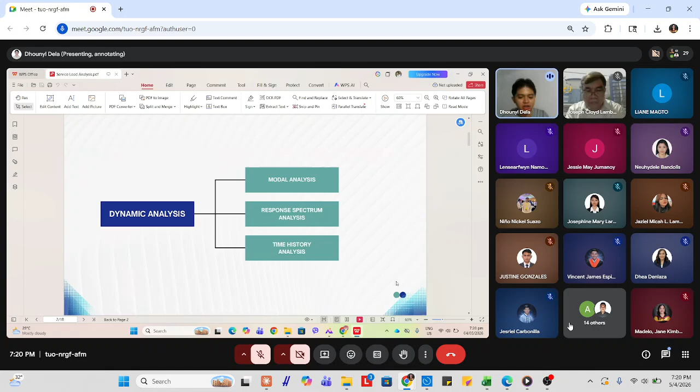So there is atong section 406.6.3.2. So it is stated sa point 1, the immediate and time-dependent deflections due to gravity loads shall be calculated in accordance with section 424.2. And for the next section, it shall be permitted to calculate immediate lateral deflections using a moment of inertia of 1.4 times I, defined in section 406.6.3.1, or using a more detailed analysis, but the value shall not exceed the gross moment of inertia.

So sa section 406.6.3.1, moment of inertia and cross-sectional area of members shall be calculated in accordance with tables A and B unless a more rigorous analysis is used. If sustained lateral loads are present, your I for columns and walls shall be divided by that quantity, where your beta sub ds is the ratio of your maximum factored sustained shear within a story to the maximum factored shear in that story associated with the same load combination. So ako ipakita ang duha ka tables, tables A and B. So table A, you have your moment of inertia and cross-sectional area permitted for elastic analysis at factored load level.

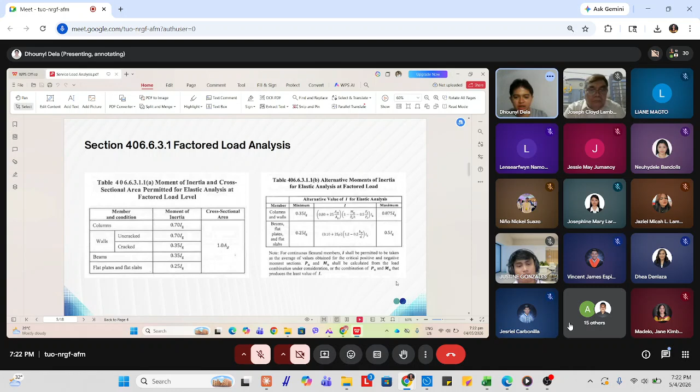Table B, mas tedious ang approach kay gina-consider niya si PU and si MU. Okay? So kani factored load analysis naman, dili na ko mo dive deep ani nga topic.

So for the next section, 406.6.3.1.2, for factored lateral load analysis, it shall be permitted to assume your moment of inertia equal to 50% of your gross moment for all members, or to calculate I by a more detailed analysis considering the reduced stiffness for all members under the loading conditions.

For the next section, for factored lateral load analysis of two-way slab systems without beams, which are designated as part of the seismic force resisting system, your moment of inertia for slab members shall be defined by a model that is in substantial agreement with results of comprehensive tests and analysis, and your moment of inertia of other frame members shall be in accordance with section 406.6.3.1.1 and point 2.

Code basis lang yun, ang ato ang discussion diri. However, naa koy example sa last part sa atong discussion. So section 424.2, deflections due to service level gravity loads.

Section 424.2.1, members subjected to flexure shall be designed with adequate stiffness to limit deflections or deformations that adversely affect strength or serviceability of a structure.

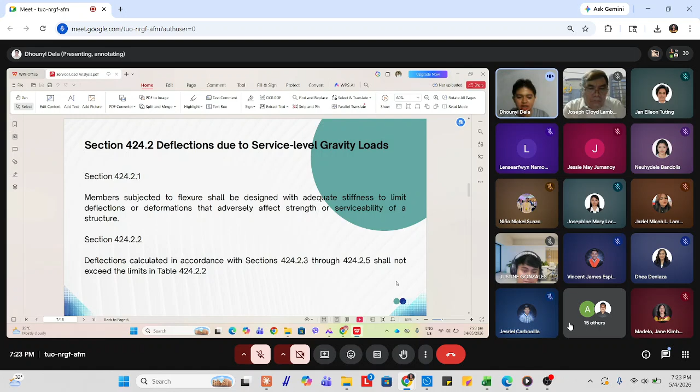And for the next section, deflections calculated in accordance with sections 424.2.3 through 424.2.5 shall not exceed the limits in table 424.2.2.

So narato ang table 424.2.2. So ang yaha is ang maximum permissible calculated deflections. So we have the following members now for flat roofs and floors.

So for flat roof with a condition not supporting or attached to non-structural elements likely to be damaged by large deflections, atong deflection you consider is immediate deflection due to maximum of roof live load, and R is your rain load. Deflection limitation is L over 180, where L is your clear span.

And for floors, so the same condition, and imong deflection you consider is immediate deflection due to L. Your limitation is L over 360.

For roofs and floors with a different condition, so you have supporting or attached. Excuse me, Engineer Dela. Yes, Doc.

So, continuing, sa roofs or floors with the condition supporting or attached to non-structural elements, so likely to be damaged by large deflections, your limitation is L over 480. And for not likely to be damaged by large deflections, your limitation is L over 240.

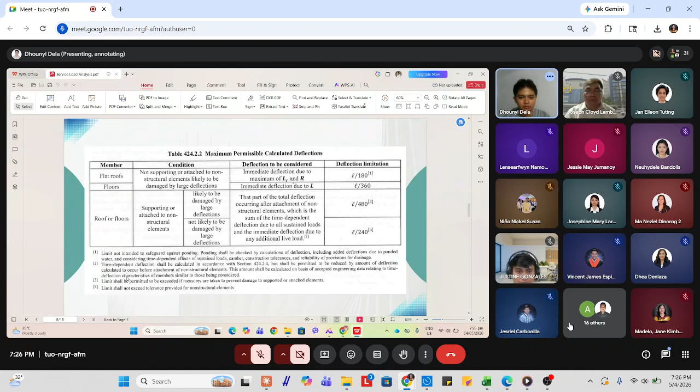Okay. For section 424.2.3, calculations of immediate deflections. So first, immediate deflections shall be calculated using methods or formulas for elastic deflections, considering effects of cracking and reinforcement on member stiffness, effect on variation of cross-sectional properties such as haunches shall be considered when calculating deflections.

And deflection in two-way slab systems shall be calculated taking into account size and shape of the panel, conditions of support, and nature of restraints at the panel edges. And lastly, modulus of elasticity, or your E sub C, shall be permitted to be calculated in accordance with section 419.2.2.

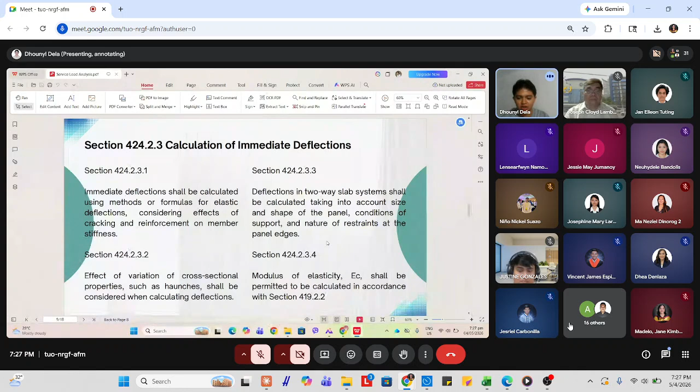So we have these formulas for non-pre-stressed members. The effective moment of inertia, or your I sub E, shall be calculated by this formula unless obtained by a more comprehensive analysis, but your effective shall not be greater than your gross moment of inertia.

So dire, your MCR, that is your cracking moment, Ma, that is your maximum moment in member at stage deflection, and kani, this is your gross moment of inertia. Your ICR is your cracking moment of inertia.

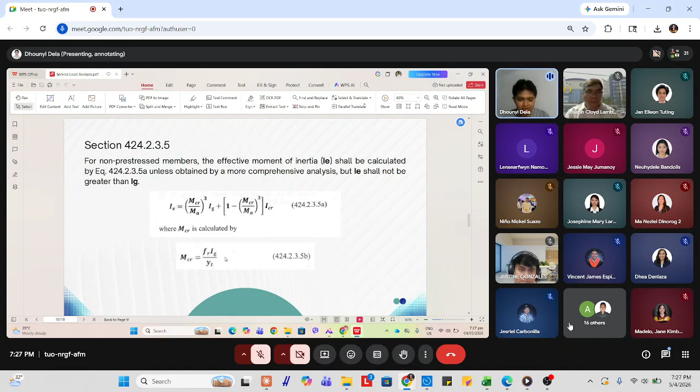Your MCR is calculated using this formula, your modulus of rupture times your gross moment of inertia over your Y sub T. So na example ani later.

And for pre-stress, class U slabs and beams as defined in section 424.5.2, it shall be permitted to calculate deflections based on the gross moment of inertia.

So you have this table. Class U means uncracked. Your limit for f sub T should be less than or equal to 0.62 times the square root of your FC prime. For transition, between uncracked and cracked, your f sub T is between 0.62 times the square root of FC prime and less than or equal to the square root of FC prime. So 0.62 times the square root of FC prime becomes your boundary.

And for cracked, you have class C, so your f sub T is greater than the square root of your FC prime.

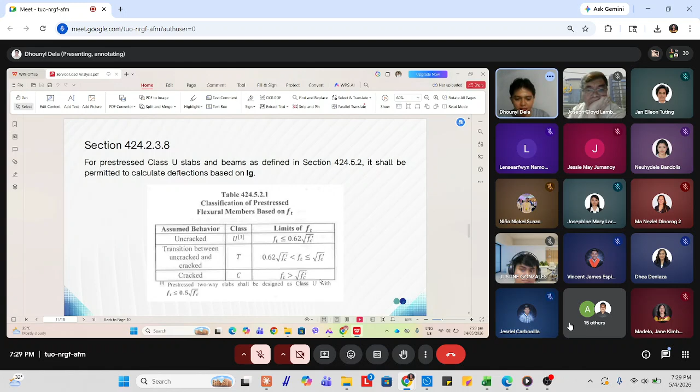For prestressed class T and class U slabs and beams as defined in section 424.5.2, deflection calculations shall be based on cracked transformed section analysis. It shall be permitted to base deflection calculations on a bilinear moment deflection relationship, or your effective moment of inertia in accordance with equation 424.2.3.5a, where your cracking moment is calculated using this formula.

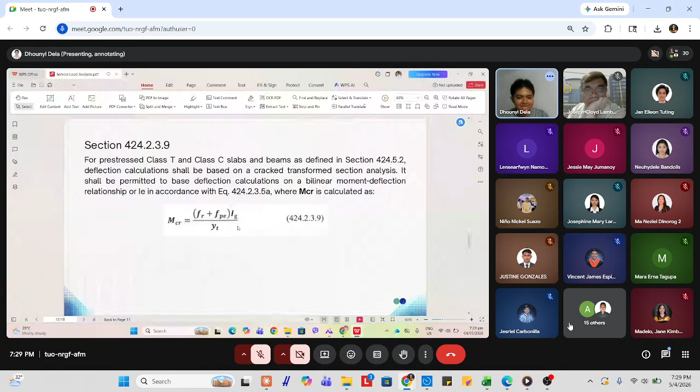For the calculation of time-dependent deflections, unless obtained from a more comprehensive analysis, additional time-dependent deflection resulting from creep and shrinkage of flexural members shall be calculated as a product of the immediate deflection caused by the sustained load and this factor, given by this symbol.

This is read as ξ over 1 plus 50 times rho prime, where rho prime equals the area of steel over your BD. So ξ is your time dependent factor, given by this table.

For sustained load duration, for example if you sustain your loads for 3 months, your time dependent factor is 1. If 6 months, that is 1.2. If 12 months, that is 1.4. If 60 months or more, your time dependent factor is 2.

Now how about if your time duration is in between, like between 3 and 6 months? You just interpolate, since it's linear interpolation.

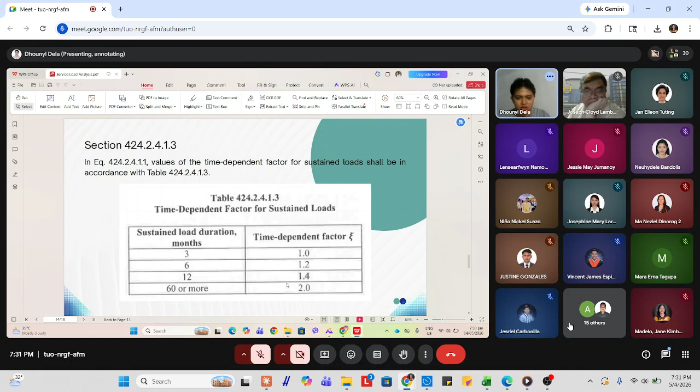Additional time-dependent deflection for prestressed concrete members shall be calculated considering stresses in concrete and reinforcement under sustained load and the effects of creep and shrinkage of concrete and relaxation of prestressed reinforcement.

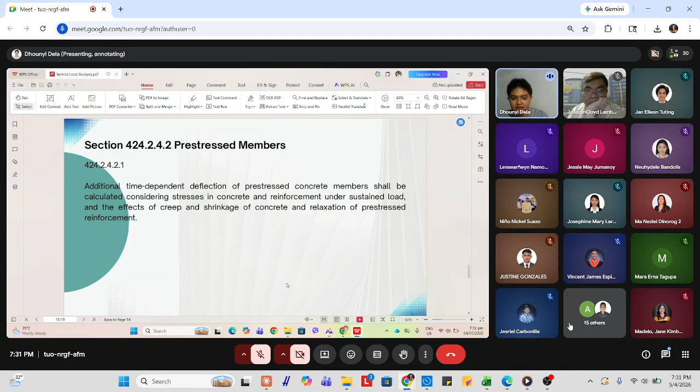Then, calculation of deflections of composite concrete sections. If composite concrete flexural members are shored during construction so that after removal of temporary supports the dead load is resisted by the full composite section, it shall be permitted to consider the composite member equivalent to a monolithically cast member for calculation of deflections.

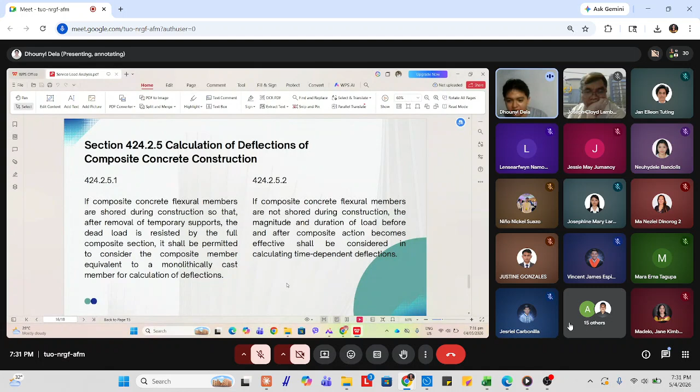If composite concrete flexural members are not shored during construction, the magnitude and duration of load before and after composite action becomes effective shall be considered in calculating time-dependent deflections.

So I have an example here. A 300 mm by 600 mm beam is reinforced with 5 16mm steel bars with steel cover of 60 mm, using FC prime equal to 28 megapascal and FY equal to 414 megapascal. Unit weight of concrete is 24 kilonewton per cubic meter. Letter A: determine the effective moment of inertia of the beam, which carries a concentrated live load of 40 kilonewton at the free end of a 2-meter cantilever span. Letter B: determine the immediate deflection of the beam.

So for the solution, here is the situation. We have a 2-meter cantilever beam carrying a uniform dead load, plus a concentrated live load of 40 kilonewton at its end. So wait.

Solving for the uniform load: you have 24, the unit weight of concrete, times the cross-sectional area of the beam, giving 4.32. Given a 60 mm steel cover, that's from the outermost fiber to the centroid of the steel, so we have 60 here, and the bottom becomes 540.

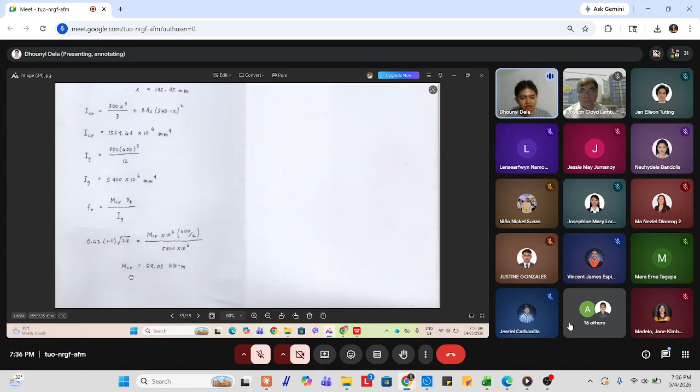Solving for your cracking moment, you have this equation. So per the code, I'll transform it in terms of FR. Your FR is equal to 0.62 times 1.0 times the square root of your FC prime. Now in the formula for modulus of rupture in the code, that 1.0 is your modification factor depending on the type of concrete used. Assuming normal weight concrete, your lambda is equal to 1.0. So times your MCR times 10 raised to 6, so the resulting answer is in kilonewton meter, times y sub t, that is 600 over 2, times your gross moment of inertia, 5,400 times 10 raised to 6. Your cracking moment then is equal to 59.05 kilonewton meter.

Now for your maximum moment, that is equal to your uniform load, 4.32 times 2 times the moment arm of 1, plus concentrated load of 40 times the moment arm of 2. So you have a maximum moment of 88.64.

Now substituting these values into this formula, you get the effective moment of inertia equal to 2,695.05 times 10 raised to 6 mm to the fourth. This solves for what letter A is asking, which is to determine the effective moment of inertia of the beam. So this is your answer.

And for letter B, what's being asked is your immediate deflection. So for the immediate deflection, you have a cantilever, so there's deflection due to dead load and deflection due to live load. Solving for your deflection due to dead load, that is given by this formula, and for your deflection in terms of live load, that is given by this formula.

Now given all that, you have your W sub D, that is equal to 4.32. Length of your beam is 2 meters. Your E here is your modulus of elasticity of concrete, that is 24,870, and your effective moment of inertia, the one we got earlier, 2,695. So substitute all that, and your total immediate deflection is equal to 1.72 mm.

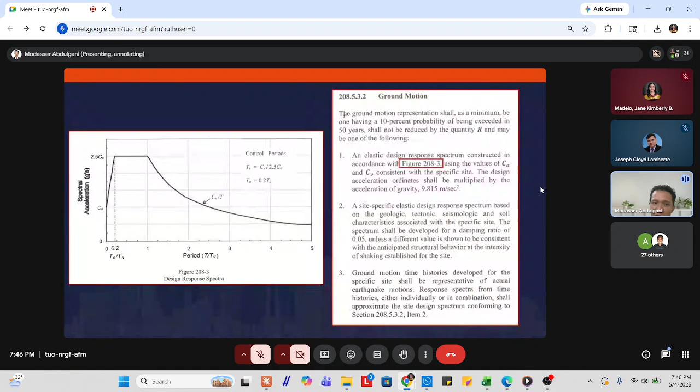And number 3, ground motion time histories developed for a specific site shall be representative of actual earthquake motions. The response spectra from time histories either individually or in combination shall approximate the site design spectrum conforming to section 208.5.3.2 item 2. So kana silang tulo si ground motion, take note ana kay makita nato ang value unya na ay reduction na mahitabo under this ground motion.

So the corresponding response parameters, including forces, moments, and displacements, shall be denoted as elastic response parameters. Elastic response parameters may be reduced in accordance with section 208.5.3.5.4. So naanay reduction kani sa 208.5.3, ato na makita mo niya.

So the base shear for a given direction determined using dynamic analysis must not be less than the value obtained by the equivalent lateral force method of section 208.5.2. If you can still remember, kaning section is mo ni atuang magamit in solving the base shear for the static force procedure. Mo ni ang gidiscuss ni Engineer Plaza last meeting. So dapat atong base shear daw sa dynamic analysis must not be less than sa atong value na makuha diri. Okay, makita na nato na.

So number of modes: the requirement of section 208.5.3.4.1 that all significant modes be included may be satisfied by demonstrating that for the modes considered, at least 90% of the participating mass of the structure is included in the calculation of response for each principal horizontal direction.

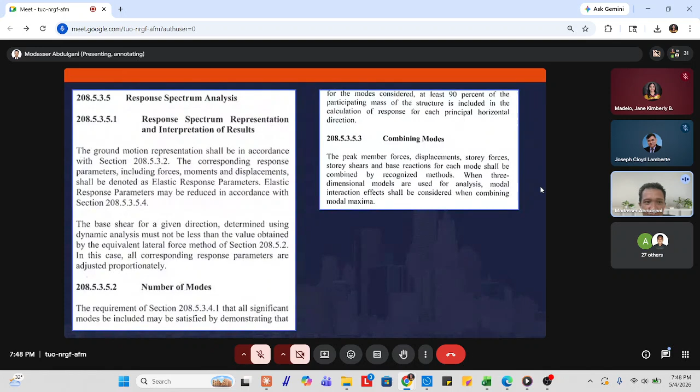Combining modes: the peak member forces, displacements, story forces, story shears, and base reactions for each mode shall be combined by recognized methods. When three-dimensional models are used for analysis, modal interaction effects shall be considered when combining modal maxima. So mo ni atong gi-mention ganiha nga section sa reduction of elastic response parameters.

So elastic response parameters may be reduced for purposes of design in accordance with the following items, with the limitation that in no case shall the elastic response parameter be reduced such that the corresponding design base shear is less than the elastic response base shear divided by the value of R. So kung nakita ninyo ato ang mga values sa static, katong ganiha, naa ay denominator na R.

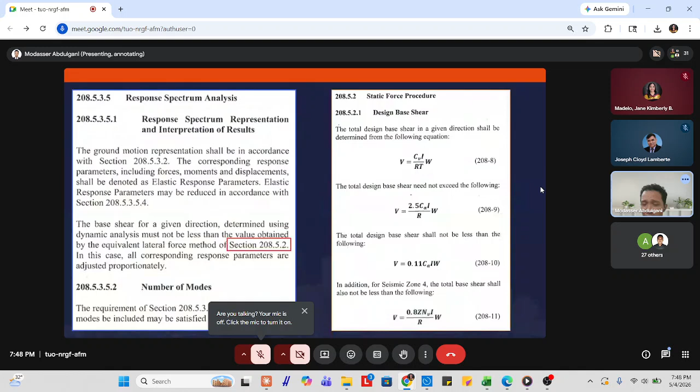So naa ay reduction of the value by dividing by R. So nganong mo-divide man ta og R? In reality, structures are expected to yield and dissipate energy through plastic deformation. If you can still remember sa atong steel design sa undergrad, dili lang taman sa yield strength sa atong steel. Taman ta sa plastic hinge, maka-create pa sa plastic hinge sa plastic design. So, full value of R in static procedure reflects this ductility and energy dissipation capacity.

However, since response spectrum analysis assumes the structure remains elastic, it cannot directly simulate yielding, cracking, or plastic hinge formation. To compensate for this limitation and avoid unconservative, unsafe results, the code reduces the benefits of R. So naa tay reduction. So sa reduction na to, naa tay basis diri.

Number 1, for all regular structures where the ground motion representation complies with section 208.5.3.2, item 1, katong sa ground motion, kung diri daw siya nabilang, elastic response parameters may be reduced such that the corresponding design base shear is not less than 90% of the base shear determined in accordance with section 208.5.2.

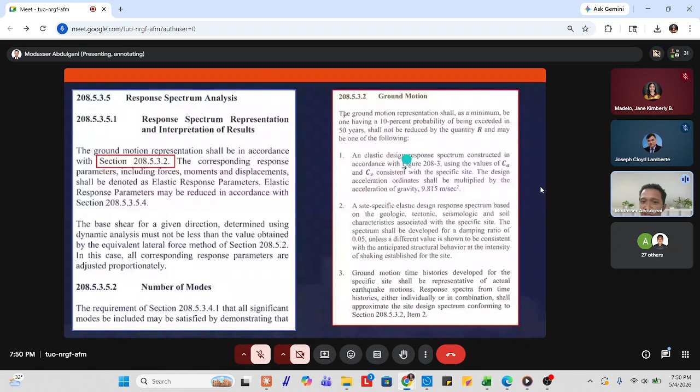Sa atong design response spectra, di ba, na-mention man to sa first slide, nga ang response spectrum analysis gina-assume niya na ang structure will behave elastic. So elastic ni siya. So naa tay reduction of R. So kung mo-reduce siya, i-divide ta og R, mu-ubos ni siya. Mu-ubos atong result.

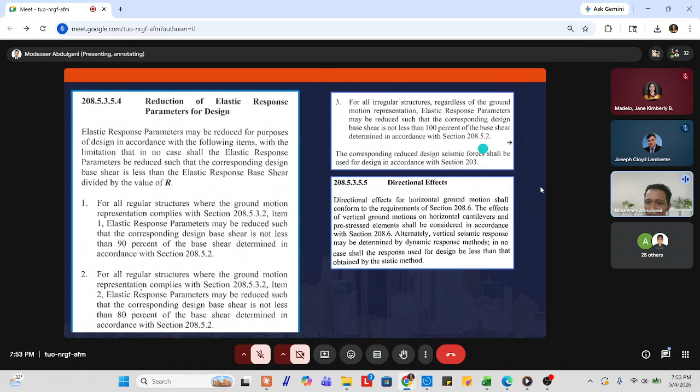And the next one, for all irregular structures, regardless of the ground motion representation, elastic response parameters may be reduced such that the corresponding design base shear is not less than 100%. So kung irregular, dili siya mu-ubos og 100% sa static. So unsay mahitabo kung mas mu-ubos ang dynamic base shear? Diha mosulod ang scale up, as long as dili ta mu-ubos aning mga parameters sa code.

So in earthquake analysis, we first compute elastic response parameters, forces assuming the structure behaves perfectly elastic. However, real structures are allowed to yield and dissipate energy. So we can reduce this force for design. But there is a strict limit, kani sa 1, 2, and 3.

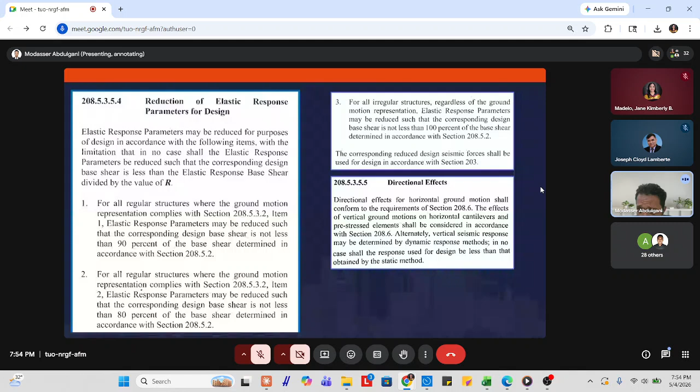Directional effects. Directional effects for horizontal ground motion shall conform to the requirements of section 208.6. The effects of vertical ground motion on horizontal cantilevers and prestressed elements shall be considered in accordance with section 208.6. Dili na nato ni i-discuss kay na-mention naman.

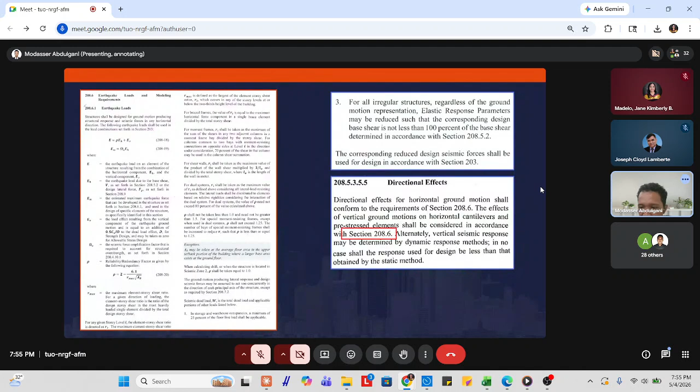Alternately, vertical seismic response may be determined by dynamic response method. In no case shall the response used for design be less than that obtained by the static method.

For the torsion, the analysis shall account for torsional effects, including accidental torsional effects as prescribed in section 208.5.1.4, where three-dimensional models are used for analysis. Effects of accidental torsion shall be accounted for by appropriate adjustments in the model, such as adjustment of mass locations, or by equivalent static procedures such as provided in section 208.5.1.3.

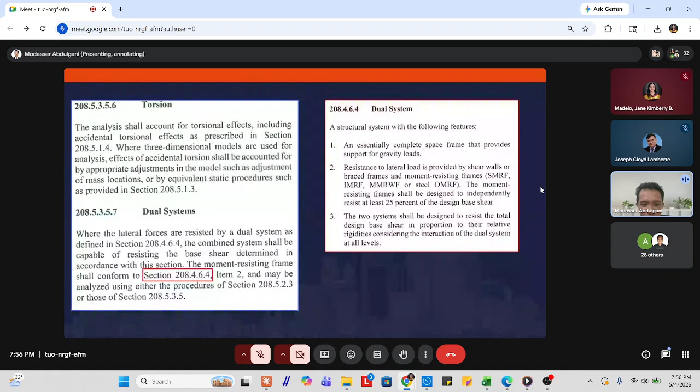For the dual systems, where the lateral forces are resisted by a dual system as defined in section 208.4.6.4, the combined system shall be capable of resisting the base shear determined in accordance with this section. The moment resisting frame shall conform to section 208.4.6.4, item 2, and may be analyzed using either the procedure of section 208.5.2.3 or section 208.5.3.5.

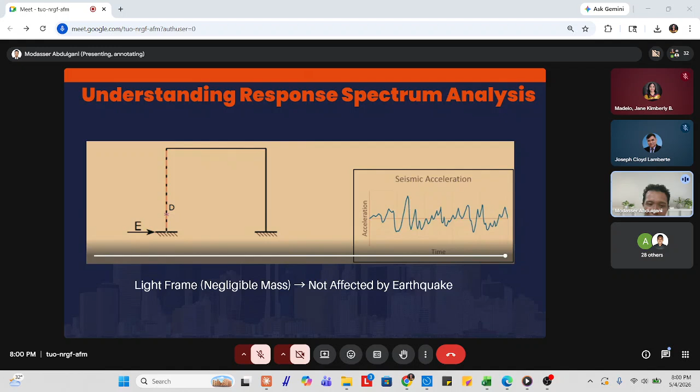Dugang sa example. Now let's add considerable mass at the top of the building and see what's going to happen. When we subject the building to an earthquake motion at the base, the building will not move as one unit as before. There will be a difference in motion between the top of the building and its base. Same scenario sa tao nga nisakay og usa ka sakyanan. Kung sakay ka og isa ka sakyanan, example.

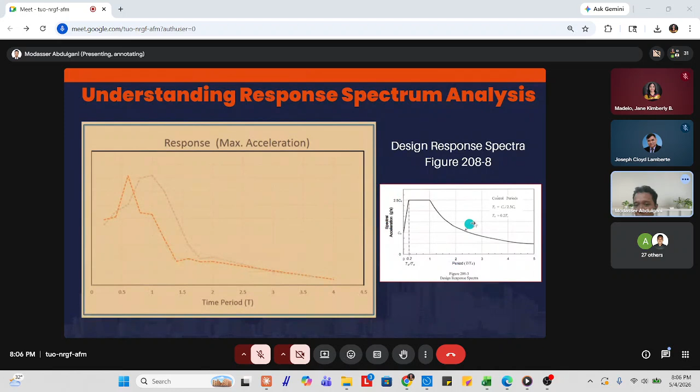So natin data diri si zone 4, seismic source type A, closest distance to known seismic source 10 km. So soil profile type is SD, stiff soil profile. So based on the corresponding tables of the NSCP, we obtain the following parameters.

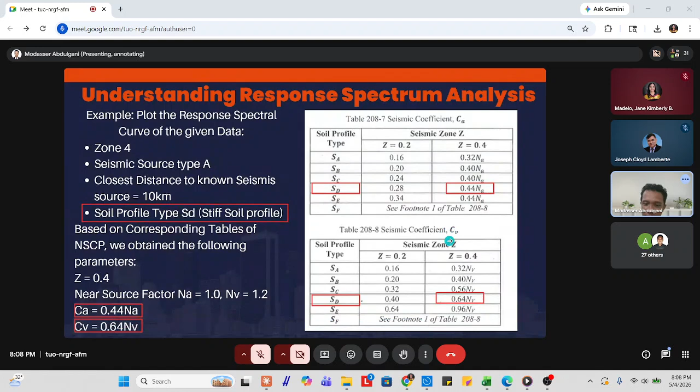208-7. Si CA, since ato ang soil profile type is S sub D, ato lang tawon ilayahang value. Under zone 4 man ta. So zone 4, so Z na to is 0.4, so direct na mo base. So si SD, 0.44 of the N sub A. So meaning, makuha na to si C sub A as the formula 0.44 NA. Sa C sub V na pod, SD, 0.64 of the NV.

Okay. So with that, let us calculate the following parameters. So CA, makuha na to. Calculating, plug in ra na to ang value ni NA 1, makuha na to 0.44. CV is 0.64 NV. Then plug in na to si 1.2 times 0.64, we will get 0.768. So para makuha na to ni si 2.5 of the CA. Asa nagikan? Yan yung 2.5 of the CA, dito na sa atuang response spectra nga curve. 2.5 CA. So calculate na nato daan para simple calculation na lang. Pag-plot na lang ta. So we have 1.1.

For the value of T sub S, which is calculated as CV over 2.5 of the CA. Asa nga formula gikan? Makita ninyo dito sa figure to get the T sub S. Then we have 0.698, and T sub 0, 0.1396. Okay. Since nakuha na ang value, we will use this figure or this diagram para ma-plot na to ug ma-analyze ang example.

So with that, ato ang na-solve, C sub A. Sa ato ang C sub A, 0.44. So atong value is 0.44 G, gravity. So naa in terms of gravity, kaya multiply pa nato into gravitational acceleration, 9.81 meter per second square, to convert it into acceleration. So we have this one.

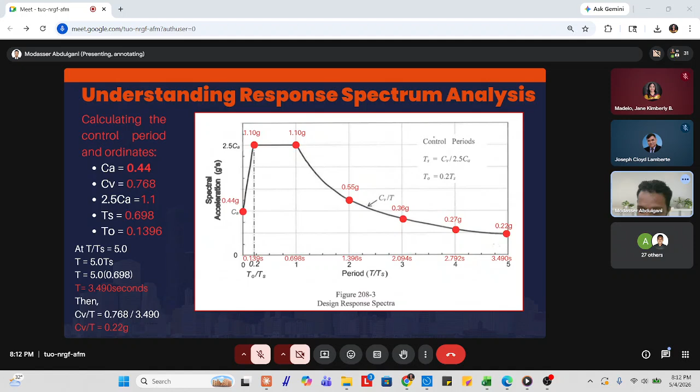And so on. So sa design response spectra, all those ordinates are dependent on the value of our zone type and NA. So pwede na ni buhatan og Excel. Gisulayan ko nagbuhat og Excel para to simplify the calculation. Since ang value is dependent ra sa soil type.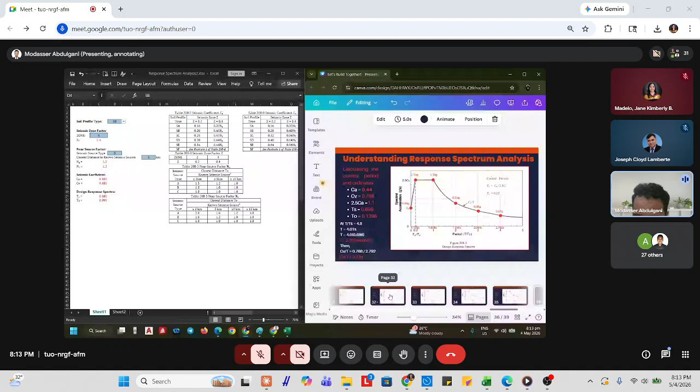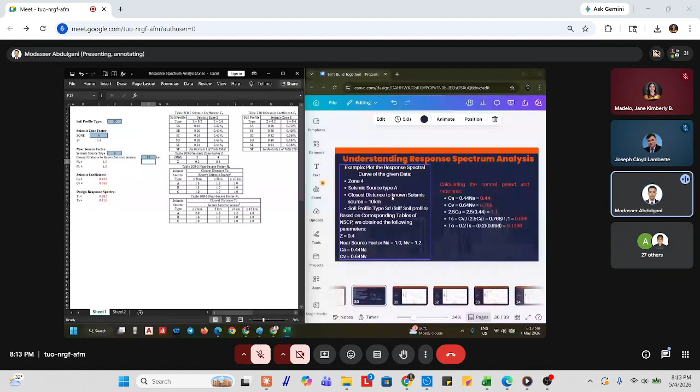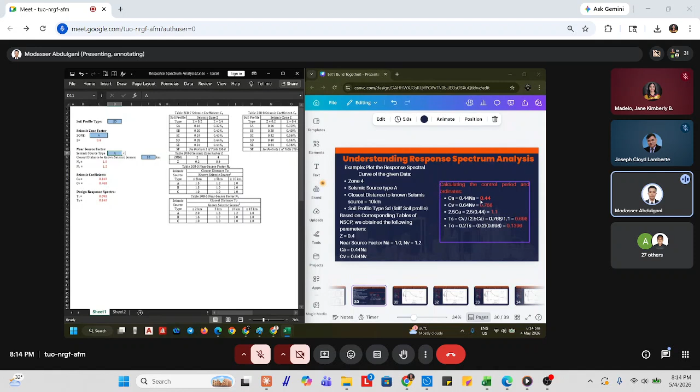And the closest distance is 10 kilometers. The seismic source type is A. So the value of NA is 1, NV is 1.2, and for CA it's 0.44, since NA is just 1, so 0.44 is the value. And for CV it's 0.768, and for TS and T sub, 0.

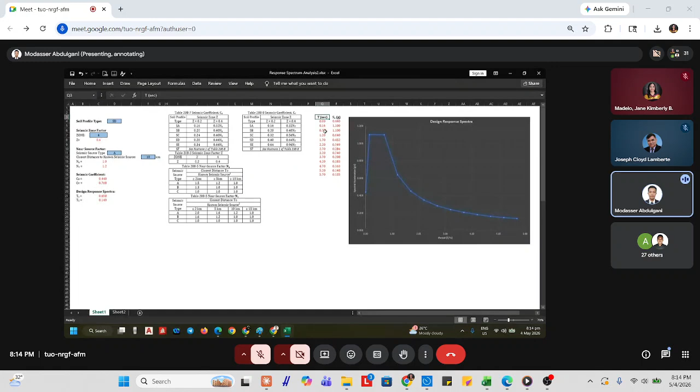And with that, after studying my report, I made this conclusion. Response spectrum analysis is an essential method to evaluate how buildings respond to earthquake forces. It considers the dynamic properties of the structure, such as the natural period, mode shape, and damping.

This wasn't discussed much since we already covered structural dynamics, so we're already familiar with it — the damping and the modal participation to determine lateral displacements, story drifts, and internal forces. By combining the effects of different vibration modes, response spectrum analysis provides a more reliable seismic response compared to

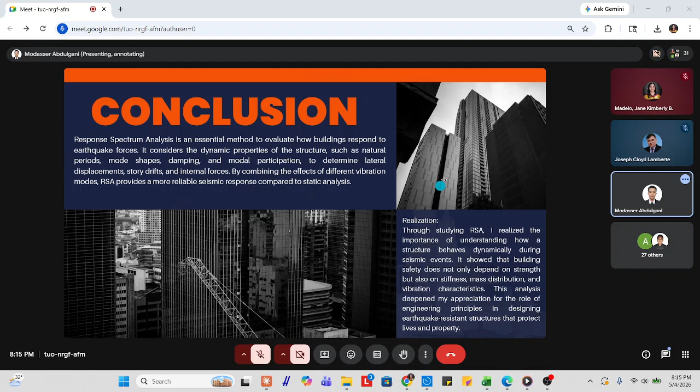static analysis. Realization: through studying RSA, I realized the importance of understanding how a structure behaves dynamically during seismic events. It shows that building safety does not only depend on strength, but also on stiffness, mass distribution, and vibration characteristics. This analysis deepened my appreciation for the role of engineering principles in designing earthquake-resistant structures that protect lives and property. And that's all, thank you.

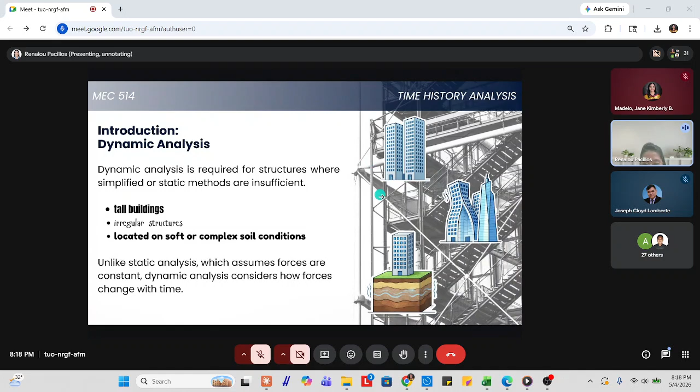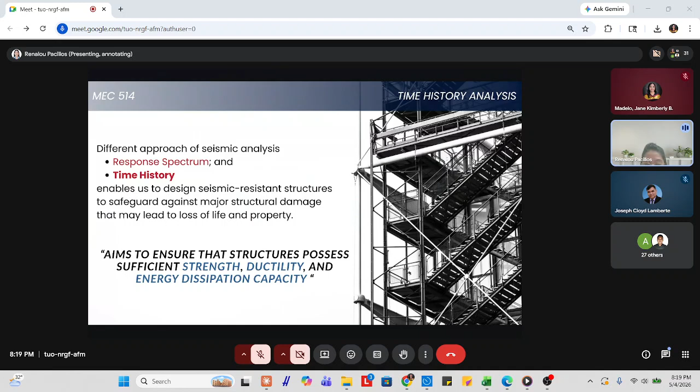That is why, by using different approaches of seismic analysis, such as the response spectrum discussed earlier and the time history method, these approaches enable us to design seismic-resistant structures to safeguard against major structural damage that may lead to loss of life and property. It is also established that these provisions prioritize life safety. They are not intended to guarantee zero damage or maintain full functionality of a structure following a severe earthquake. In other words, they only aim to ensure that structures possess sufficient strength, ductility, and energy dissipation capacity to prevent collapse, thereby safeguarding occupants while also accepting that structural and non-structural damage may occur.

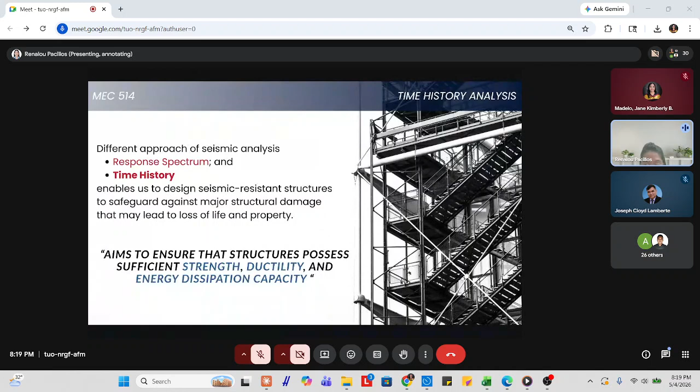So, time history analysis, as per section 208.5.3.4.2, is formally defined as the dynamic response of a structure at each increment of time, where the base is subjected to a specific ground motion time history. It considers time-varying forces — unlike static methods, earthquake forces change continuously, and this method captures those variations. It also uses real or simulated earthquake records, which represent actual ground shaking, making the analysis more realistic.

It also simulates how a structure behaves during an actual earthquake event. Aside from this, we also have to compute structural response at every time step. This means that instead of only determining maximum values, the analysis tracks displacement, velocity, acceleration, and internal forces — displacement being the deformation of the structure, velocity the rate of change of displacement or how fast the structure is moving at any instant, acceleration the rate of change of velocity, and internal forces the forces developed inside structural elements due to earthquake motion. So at every moment during the earthquake, this allows us to capture peak response, sequence of structural behavior, and possible nonlinear effects.

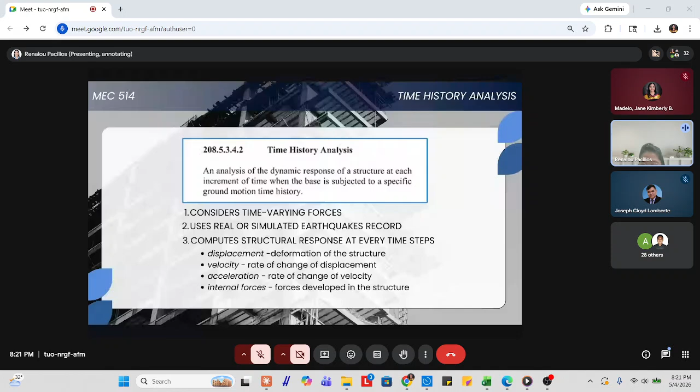So to better understand the connection of the structural response over time, we have here a sample figure. This figure illustrates how time history analysis evaluates the structural response during an earthquake by tracking behavior every time step. As you can see on the left side, we see the ground motion of earthquake excitation, represented as an acceleration time record. This is the input applied at the base of the structure, causing the building to shake.

As the ground shakes or moves, the structure responds dynamically, and we monitor a specific point, this one here, the red dot. For example, let us say our time is at 4.20 seconds. The response of the structure is evaluated simultaneously in terms of displacement, velocity, acceleration, and internal force.

So the first graph shows displacement, which represents how far the structure moves from its original position. This is also indicating deformation and is important for checking drift limits.

The second graph is the velocity time. This shows how fast the structure is moving, which helps us understand the dynamic motion and energy dissipation during the earthquake.

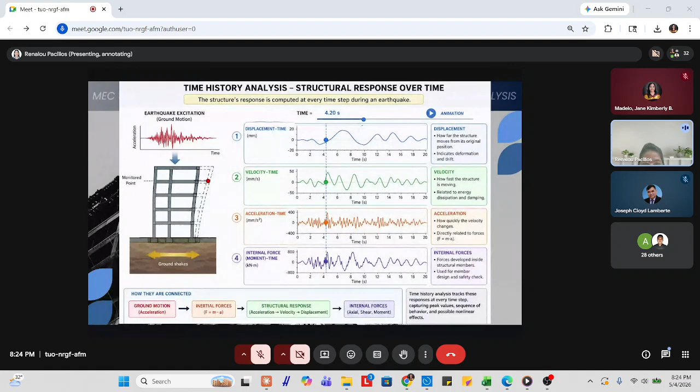So how are they connected? These responses are connected due to the fact that acceleration causes inertial forces, which generate internal forces. At the same time, these inertial forces and internal forces produce motion in terms of velocity and displacement. So therefore, the bottom line is that the time history analysis provides a complete picture of structural behavior, not only peak values.

A key requirement of this method is the use of ground motion records, which represent earthquake shaking. These records must represent the design basis earthquake and should be based on real or simulated earthquake data. The record should also reflect actual site conditions.

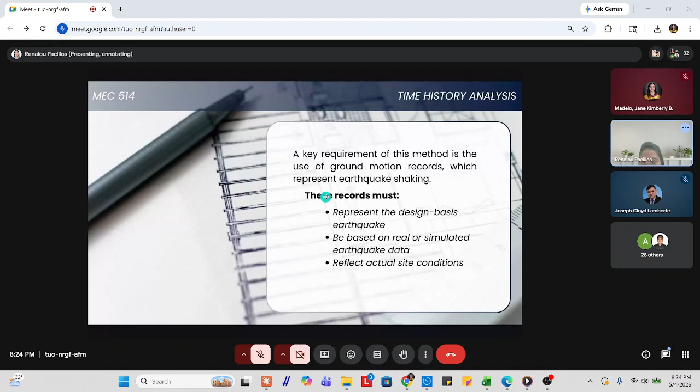As per section 208.5.3.6, which is discussing the time history analysis, I will go through it one by one so it can be understood well.

As per the section, the time history analysis shall be performed with pairs of appropriate horizontal ground motion, which means using two components of motion at the same time, both x and y directions. As we all know, the seismogram, aside from moving horizontally, also moves vertically. These motions in the x and y direction are called pairs.

It is because, as we notice during an earthquake, it does not shake in one direction. They act simultaneously in multiple directions, so analyzing only one direction would be unrealistic.

The second one is, time history should be selected and scaled from not less than 3 recorded events. The NSCP requires at least 3 pairs of ground motion records.

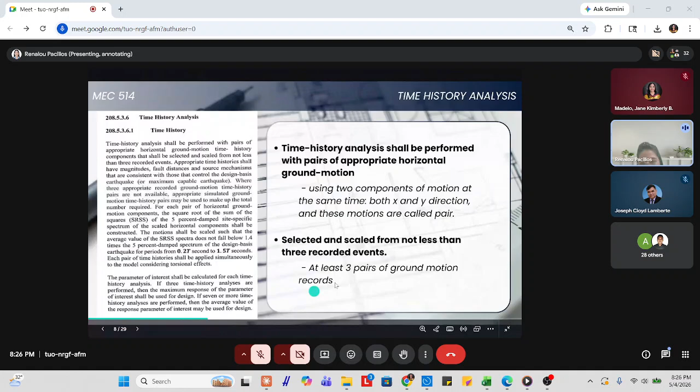The next one is, recorded events must be chosen based on their consistency with the design basis earthquake or maximum capable earthquake. Consistency is measured by magnitude, fault distance, and source mechanism. There are several factors to consider due to the reason that a near fault earthquake behaves very differently if it is far.

Next, if recorded events are not available, simulated records may be used. If 3 appropriate record pairs cannot be identified, the specialist may utilize simulated ground motion time history pairs to complete the set.

The next one is, the motion shall be scaled such that the average value of the SRSS, or the square root of the sum of the squares, spectra of all sets does not fall below 1.4 times the 5% damped spectrum of the design basis earthquake. This threshold must be maintained over the period range of 0.2T to 1.5T seconds, where T is the fundamental period of the structure.

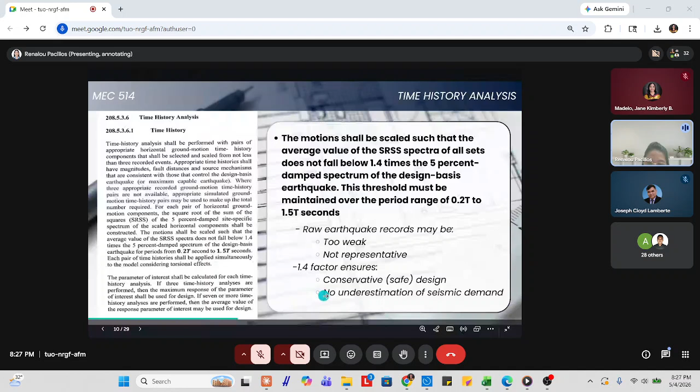The scaling mentioned here is required since there are earthquakes that are not representative or ideal to study. Aside from that, the 1.4 factor ensures a conservative, safe design analysis, and that there should be no underestimation of seismic demand.

The next one is the combination of results. If there are 3 time history analyses, you're going to use the worst case or maximum result, since a small sample size has lesser statistical confidence, so you have to choose the most critical response. But if there are 7 or more time history analyses, you have to use the average response, since a larger data set is more reliable, giving balanced representation and less overly conservative design.

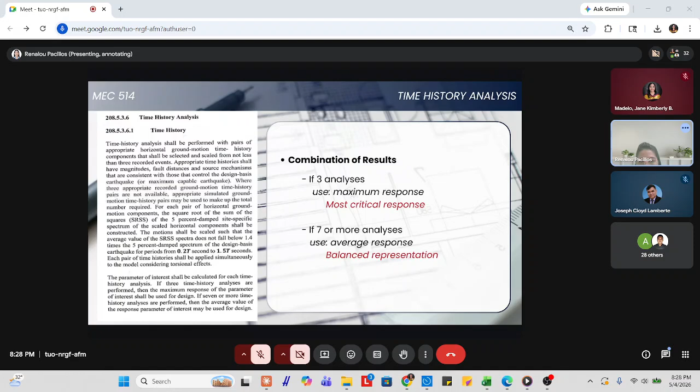Next under this section is 208.5.3.6.2, which is all about the elastic time history analysis. Most of the codes mentioned here were already discussed by the previous reporter, Engineer Abdul Ghani, about the response spectrum.

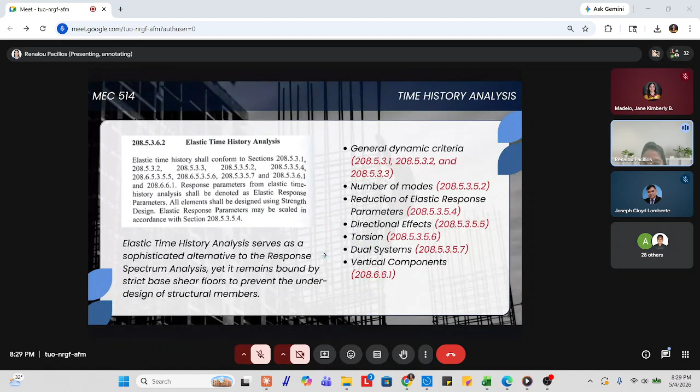They talk about general dynamic criteria under 208.5.3.1, 208.5.3.2, and 208.5.3.3. Aside from the general dynamic criteria, it also states codes about number of modes, reduction of elastic response parameters, directional effects, torsion, dual systems, and vertical components. I'll just discuss the first one since the rest already focused on the discussion by Engineer Abdul Ghani.

In section 208.5.3.1, the code states that structural dynamic analysis should follow principles of structural dynamics, meaning equations of motion such as mass, damping, and stiffness must be satisfied. In connection with the time history analysis, ground motion must be properly defined. You cannot just apply fake forces; they must represent real earthquakes.

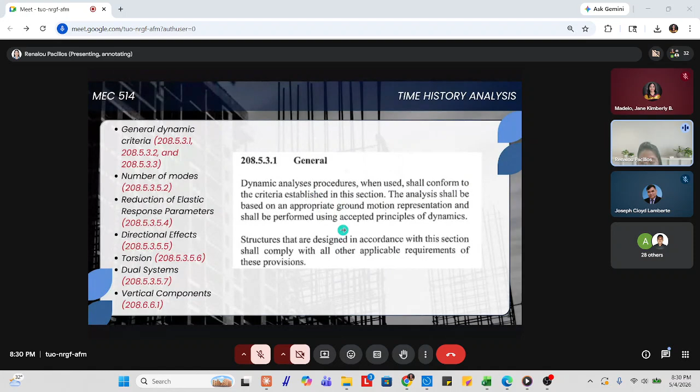For the next one is the mathematical model. It basically talks about having a model that represents mass and stiffness distribution. It also states that a 3D model is required for irregular structures, especially those with torsion or irregularities.

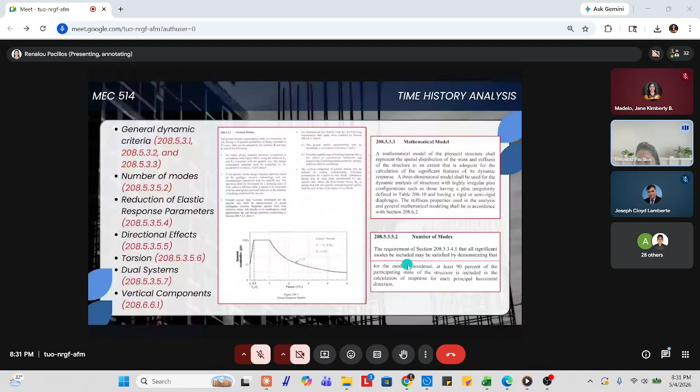The next one is the number of modes, which was already discussed earlier—those reduction factors, the 90% or scale up. So let us just proceed to the code on nonlinear time history analysis.

Nonlinear time history analysis is covered under section 208.5.3.6.3.1. This analysis occurs when a structure experiences stresses beyond its elastic limit, which can cause yielding, cracking, and stiffness degradation. Time history analysis can capture this behavior, allowing more realistic prediction.

As per the code, nonlinear time history analysis shall meet the requirements of section 208.4.8.4, which is all about alternative procedures. To summarize, this means that engineers are not strictly limited to the standard methods in the code, such as response spectrum, equivalent static, or time history. The code allows flexibility, especially for complex or innovative structures where standard methods may not be sufficient.

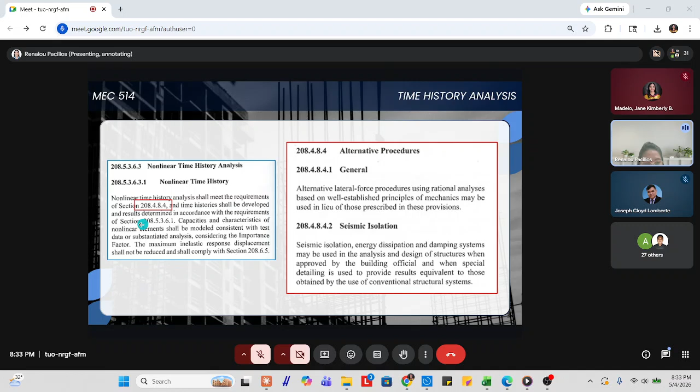Aside from that, the code mentions time histories shall be developed and results determined in accordance with the requirements of section 208.5.3.6.1, which is all about the story drift limitation. Let's go through this code one by one.

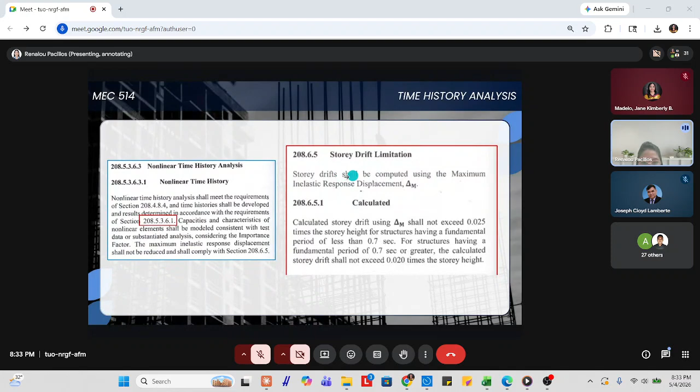First, let us discuss story drift. Story drift is the horizontal displacement between two consecutive floors. It measures how much one floor moves relative to the floor below during an earthquake, representing structural deformation during seismic loading. In other words, if the building sways, each floor shifts sideways, and drift tells you how large that movement is—a key indicator of how much the structure bends or sways.

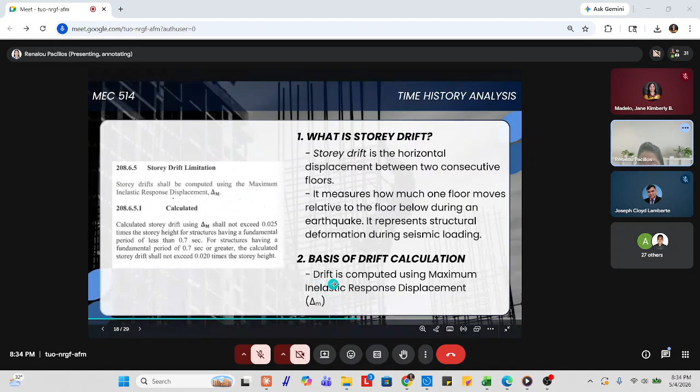Next, let us proceed with the code on the basis of drift calculation. Drift is computed using the maximum inelastic response displacement, delta sub m, which represents the actual expected displacement during a strong earthquake—not just elastic or ideal behavior. This is inelastic, meaning the structure is allowed to yield or crack.

Next are the drift limits being mentioned. As per section 208.6.5.1, there are two cases. Case number 1 talks about a structure whose time period is less than 0.7 seconds.

Ang case number 2, if ang structure daw kay na siya time period greater than or equal to 0.7 seconds. So, in case number 1, ang drift limit na to is if less than 0.7 seconds siya, so we're just going to multiply the story height with its multiplier, which is 0.025. So let us say, for example, atong story height is 3 meters. So atong allowable drift would be the product of 3 meters and the multiplier of 0.025. So the allowable drift would be 0.075 meters, or i-convert it to millimeters, we have 75 millimeters.

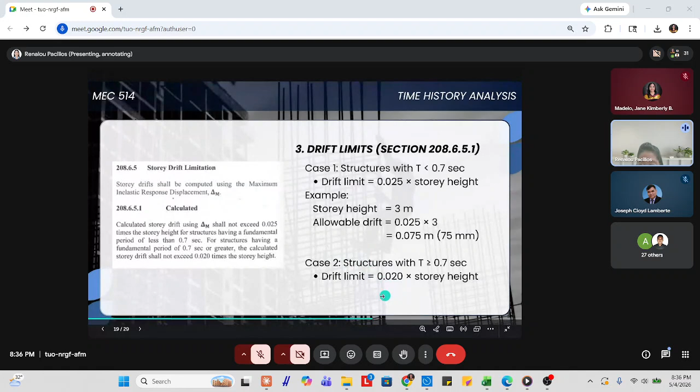So for case 2, katong greater than 0.7 seconds, so instead na 0.025 ang i-multiply, we're just going to multiply the story height to 0.020. So as you noticed, they have different multipliers since ang short period structures, which is kining case 1, usually mga low-rise buildings pa ni siya. So they are stiffer and they can tolerate slightly larger drift ratios without instability. On the other hand, kining case number 2, which is all about the long period structures, usually mga tag-as na mga buildings, so they are more flexible. They are more sensitive to large displacement. So stricter limits are imposed.

The fourth one is the reason why drift limits are important. So anong importance siya? It is being discussed here that drift limits prevent structural damage, protect non-structural components, and ensure life safety. This prevents structural damage because excessive deformation can lead to cracking or failure. This also protects non-structural components such as walls, glass, or partitions. It ensures life safety since large drift can cause falling hazards even if the structure remains standing. So all in all, drift control is about serviceability and safety. It is not all about just collapse prevention.

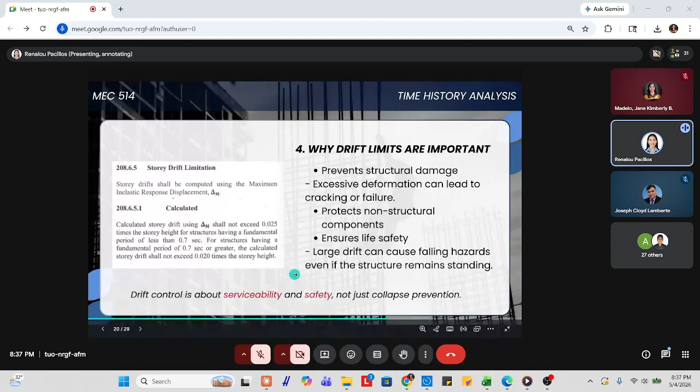So next one is the exception. So if natay drift limits, naa puy exceptions. There are two exceptions. The first exception would be ang drift daw may exceed limits if justified. So may reason, it is only allowed if it is proven safe for both structural and non-structural elements. So if ang engineer demonstrates that the structure can handle larger deformation, then higher drift is acceptable.

For exception 2, no drift limit for certain single-story steel structures. This applies to several types of structures. We have the storage buildings, factories, and workshops. Since this type of structures usually have fewer occupants and are less sensitive to damage. But wala siya limit, naa siya conditions to follow. Conditions daw is that there should be no sensitive equipment attached or the equipment must accommodate movement. So aside from all that, dapat sa atong exception, ang walls daw must still be designed for drift, section 208.7.2.3.

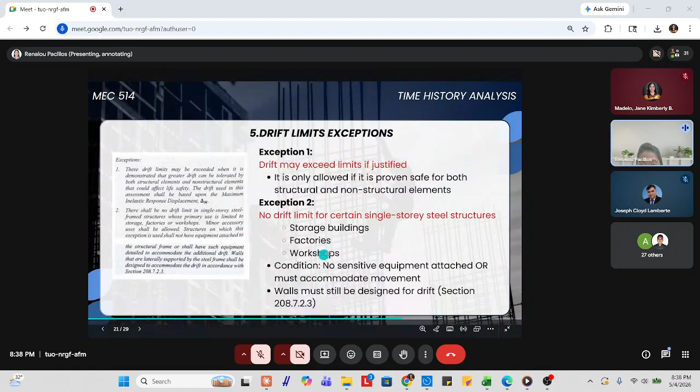So for the last one, under the code, which is the story drift limitation, naa gihapon sa ato ang mga exception sa formula to be used sa base shear. So drift calculation may ignore minimum base shear limits, like ato ang equation 208-10 and 208-11. So wala siya base shear limits because if mag-compute ang drift, you can use the actual dynamic response. So you do not need to enforce minimum base shear since drift analysis focuses on accuracy, not just conservative assumptions.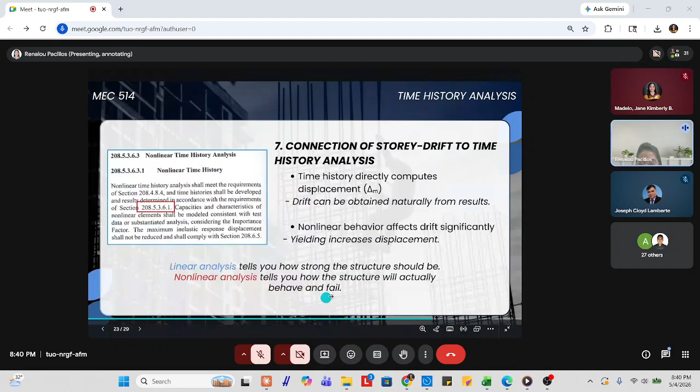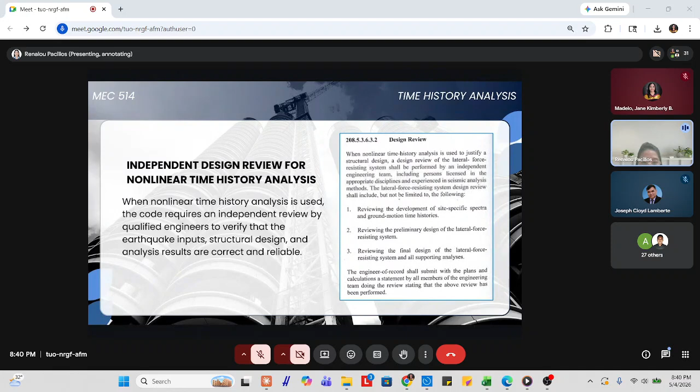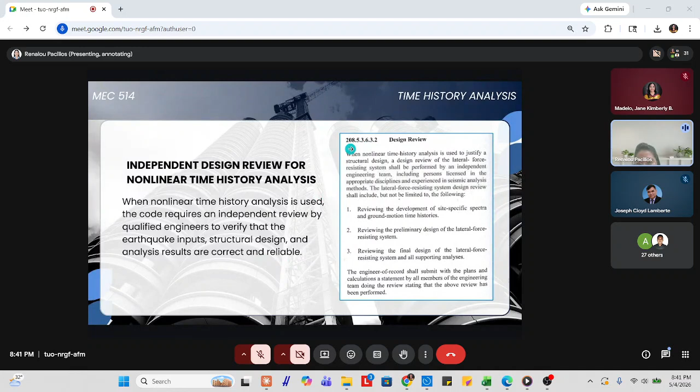Naa pud kita isa ka code about the design review for nonlinear time history analysis. When nonlinear time history analysis is used, the code requires an independent review by qualified engineers to verify that the earthquake inputs, structural design, and analysis results are correct and reliable as per section 208.5.3.6.3.2. This code suggests that there should be a general requirement. An independent design review is required when nonlinear time history analysis is used. It is required since ang nonlinear time history kay complex, lisod-lisod siya, they are sensitive to assumptions and capable of producing misleading results if done incorrectly. So the review must be performed by an independent engineering team.

So the reviewers should not be affiliated with the team, due to the fact that there might be bias or oversight in our analysis. The third one is the reviewers must be licensed and experienced in seismic analysis. So only qualified professionals can evaluate such advanced analysis.

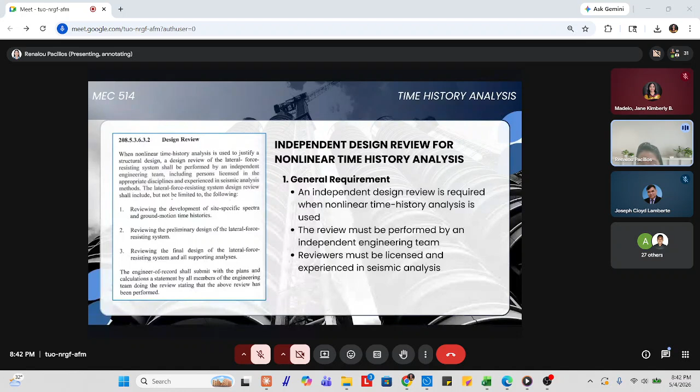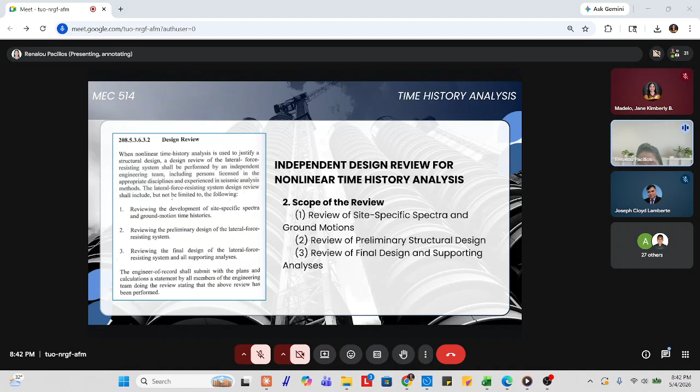For the scope of the review, we have three. The first one is the review of site-specific spectra and ground motions, which checks how earthquake inputs were developed. The second one is the review of preliminary structural design, which checks the initial design of the lateral force resisting system. The third one is the review of final design and supporting analysis. This checks the final design and all the calculations.

The next one is the documentation requirement. For this requirement, a formal statement must be submitted by the review team, and the statement must be included with plans and calculations. The reviewers must certify that they performed the required review and the design complies with code. Without this certification, the design may not be accepted.

For the fourth one, the reason why this requirement exists. Why is this a requirement? Yes, a design review. Because if we analyze with nonlinear time history, it is sensitive to errors, especially in ground motion, modeling, and assumptions. It also allows flexibility but ensures safety, which means innovation is allowed, but it must always be verified by professionals more experienced in seismic analysis.

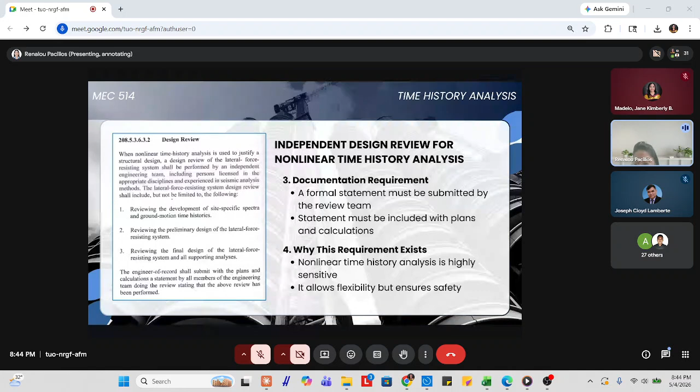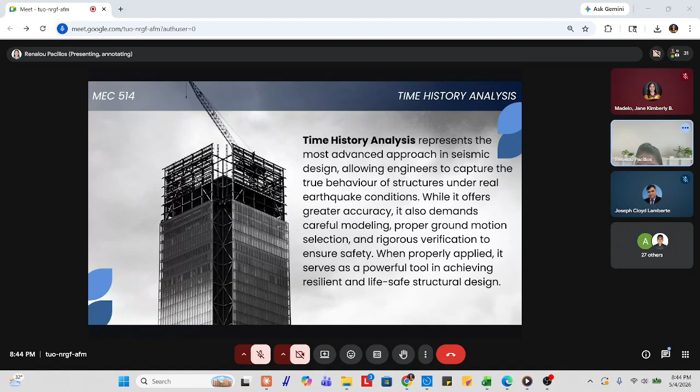So, in conclusion, time history analysis represents the most advanced approach in seismic design. This allows engineers to capture the true behavior of structures under real earthquake conditions. While it offers greater accuracy, it also demands careful modeling, proper ground motion selection, and rigorous verification to ensure safety. When properly applied, it serves as a powerful tool in achieving resilient and life-safe structural design. So that would be all. Thank you.